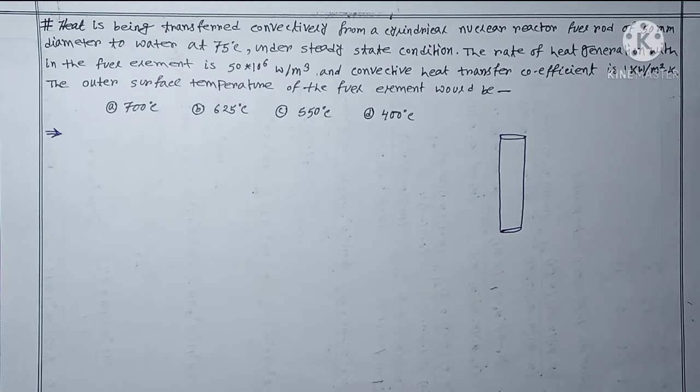In this video I will solve a few questions which will be very helpful for you for any kind of competitive exam as well as for your university exam. So let's go to the point of discussion.

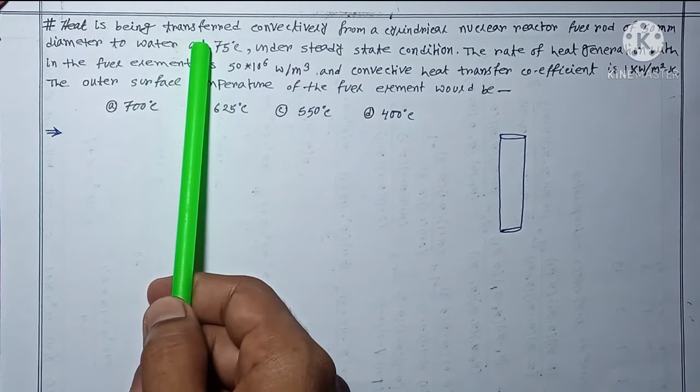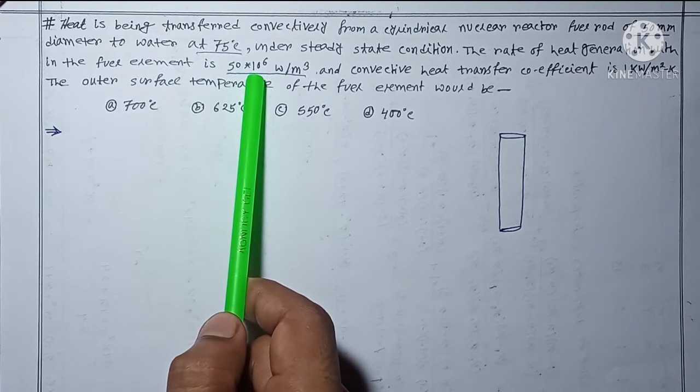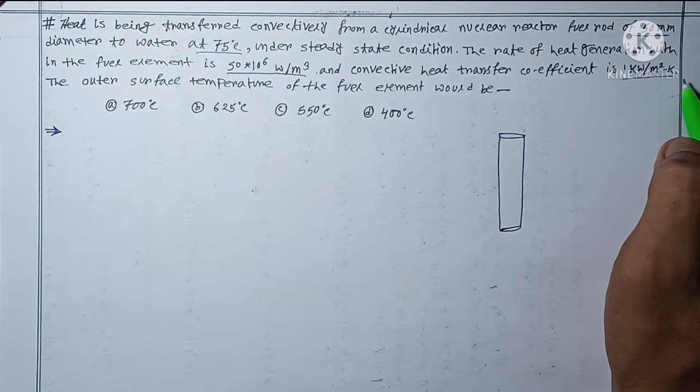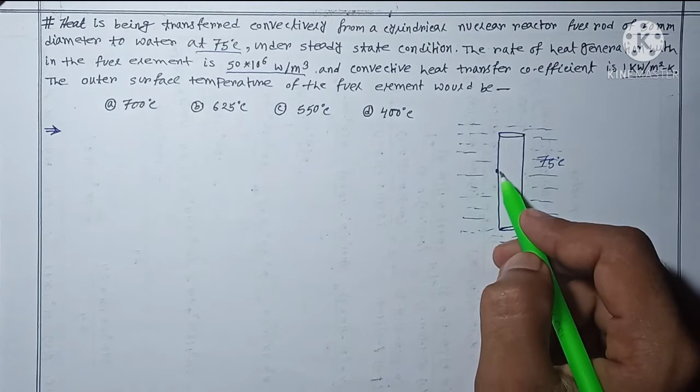First of all, carefully read the question. Heat is being transferred convectively from a cylindrical nuclear reactor fuel rod of 50 mm diameter to water at 75 degrees centigrade under steady state condition. The rate of heat generation within the fuel element is 50 into 10 power 6 watt per meter cube, and convective heat transfer coefficient is 1 kilowatt per meter square Kelvin. The outer surface temperature of the fuel element would be — so basically this is the fuel element, a nuclear rod, and around this nuclear rod there is water. The temperature of the water is 75 degree centigrade, and we have to find out the temperature of the nuclear rod, meaning the outer surface temperature of the nuclear rod, anywhere at the outer periphery. So let's try to solve the question.

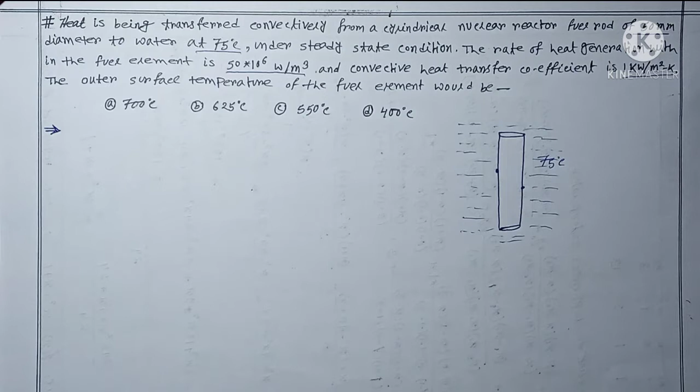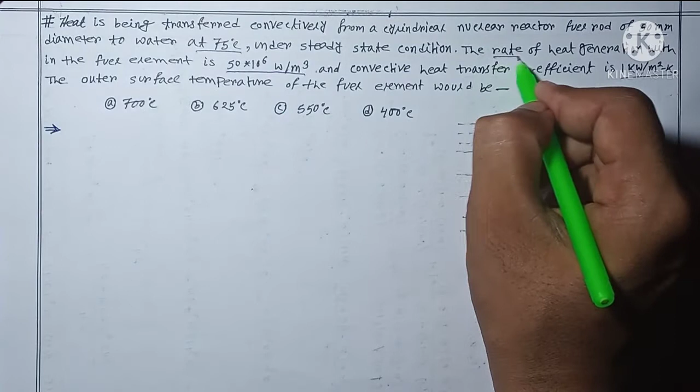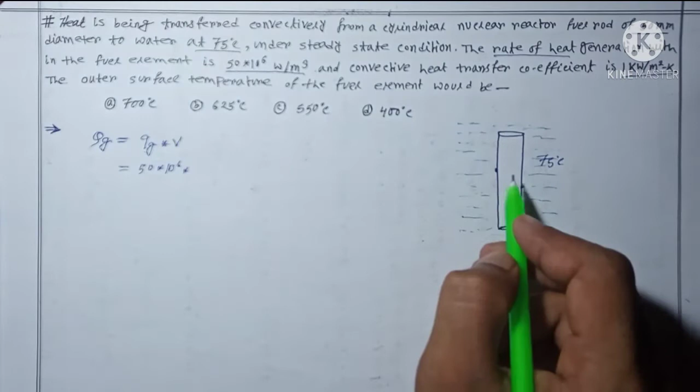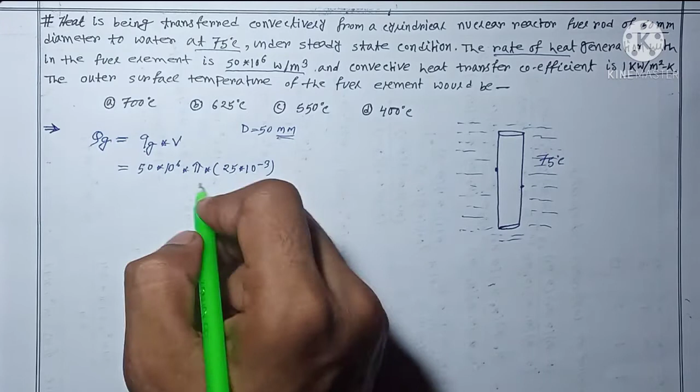First, here the heat generation is given in watt per meter cube — basically it is not heat generation, it is the rate of heat generation. So first of all we have to find out the total heat generation. Let we represent it as Q suffix G, total heat generation, capital QG. It is the small qg which represents the rate of heat generation into total volume. Now this small qg gives us 50 into 10 power 6 into volume. The rod is cylindrical in shape, so volume is pi r square into length. R value is 50 mm diameter, so radius is 25, and it is in millimeter so we have to convert it in meter, so 10 power minus 3. So pi r square into length — this is the total heat generation.

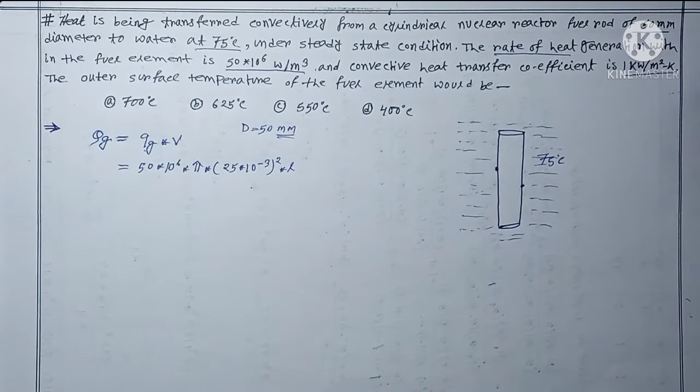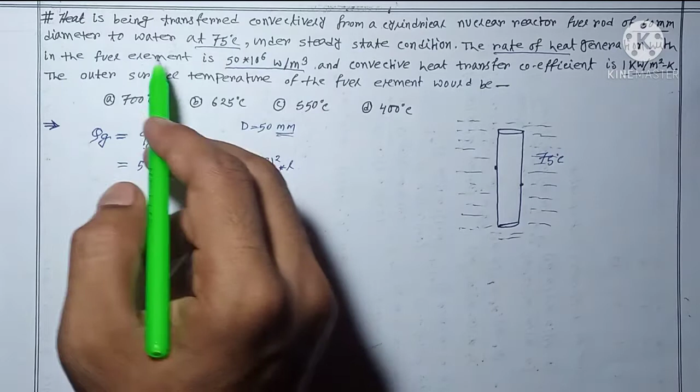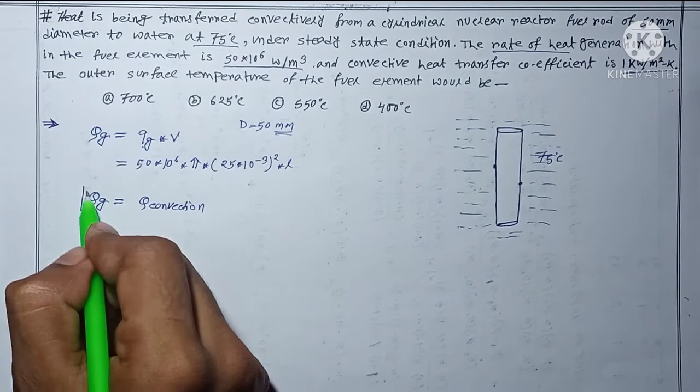Now carefully try to understand. Whatever heat generation takes place, we assume this total amount of heat generation is convected to the water — this is also given, heat is being transferred convectively. So whatever heat generation takes place, it is convected to the water. So we required to equate this total amount of heat generation equal to the total heat convection. This is the basically main point for such kind of question to solve. Whatever this amount of heat generated, it is basically transferred to the water, so we can equate total amount of heat generation equal to heat which is convected to the water.

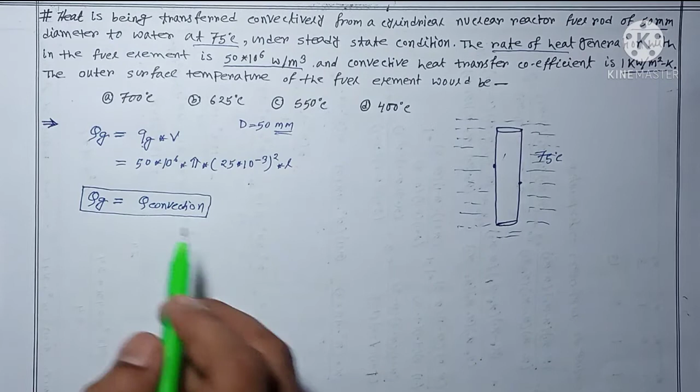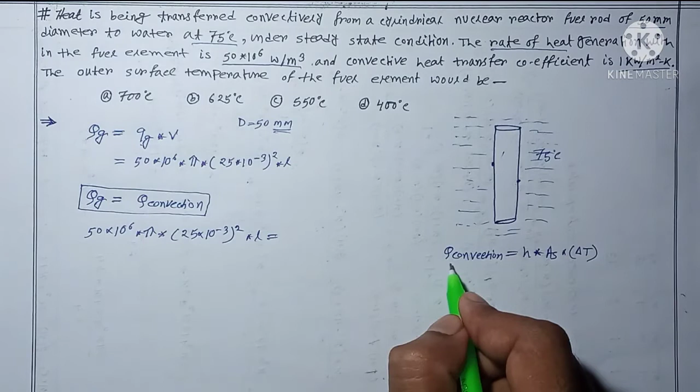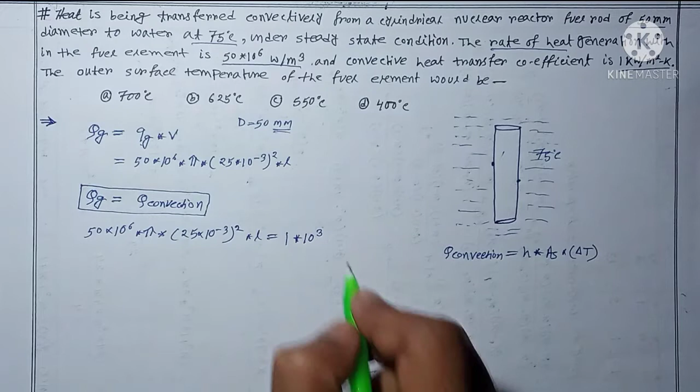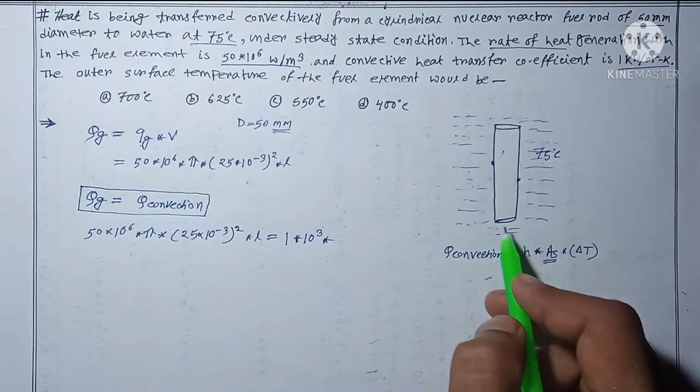So heat generation we are getting: 50 into 10 power 6 into pi into 25 into 10 power minus 3 square into L. Now this heat convection, Q convection, can be written as H into surface area into delta T, meaning temperature difference. Here this H is the convective heat transfer coefficient, given as 1 kilowatt per meter square Kelvin, but we have to convert it to watt, so multiply by 10 cube. Now this area is basically not the surface area or the cross sectional area — you have to remember this area is the area through which the heat is transferred. So based on the question, it may be cross sectional area or surface area. Here it is surface area, because throughout the whole surface heat is convected to the water, so we have to take surface area. Surface area for a cylinder is 2 into pi into r, r is 25 mm, converted to meter it is 0.025, so 2 pi r into L.

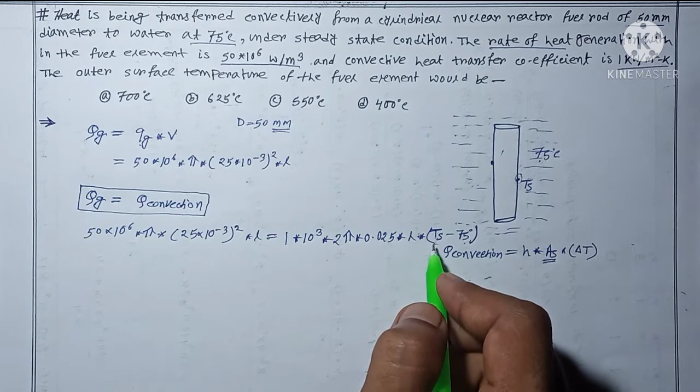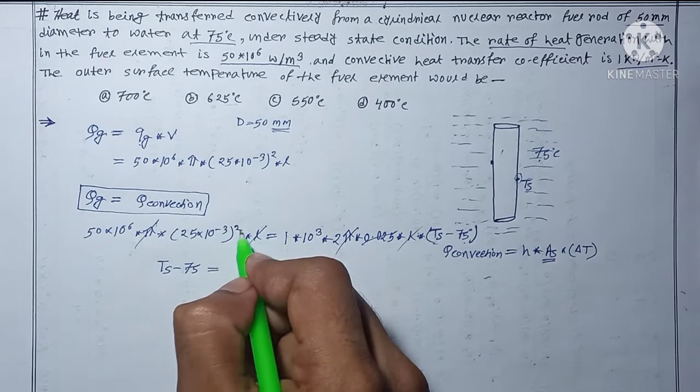Now here, temperature difference — obviously heat is generated in this nuclear rod, so surface temperature will be more than the water temperature. So let we assume Ts is the surface temperature here, minus 75 degree centigrade. Now before putting this 75 degree, please take a look at the option — if in the option they provide the answer in degree centigrade, then put it here in degree centigrade, because this is the difference in temperature, so whatever unit you put here, this will be your answer's unit. So here I put 75 degree centigrade, so whatever surface temperature I get, it will also be in degree centigrade. So here pi gets cancelled out, this L gets cancelled out. If I solve, then surface temperature minus 75 degree centigrade is equal to — and one thing, this 0.025 basically cancels this square term.

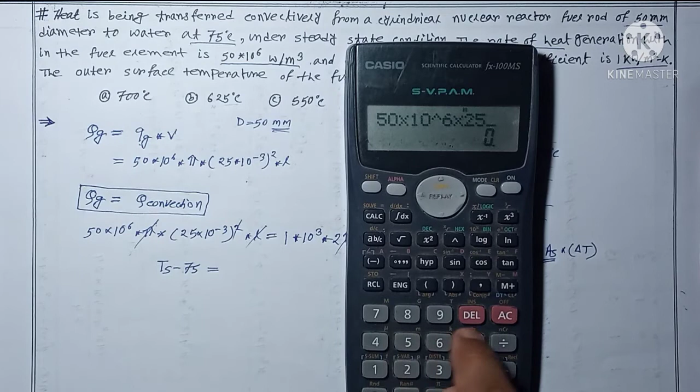So with help of calculator, let it solve: 50 into 10 power 6 into 25 into 10 power minus 3. I'm not taking the square, because this square is cancelled out by this 0.025, which is nothing but 25 into 10 power minus 3.

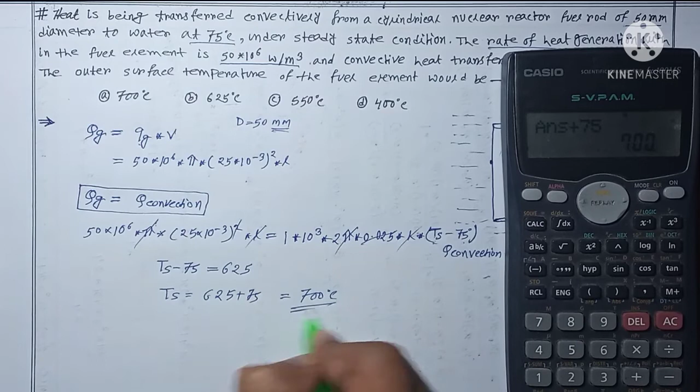So if I multiply it, I'm getting some value divided by this 10 cube. So I'm getting 1250 divided by 2, so 625. So surface temperature is 625 plus 75, I'm getting 700 degree centigrade. So basically option A is our answer.

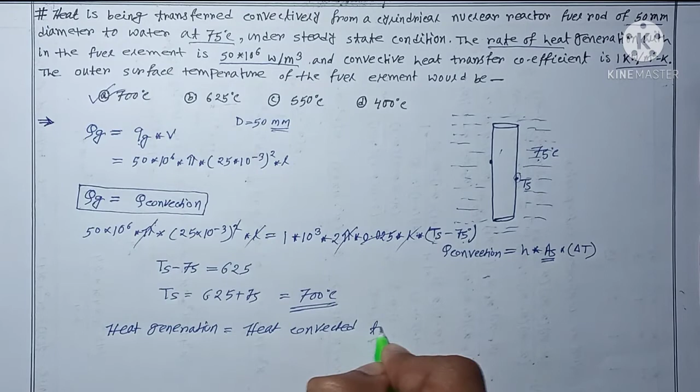So in this question, the point which you have to understand is that whatever heat generation occurs, this heat is basically convected to water. Heat generation is equal to heat convected to water. So it is clear now.

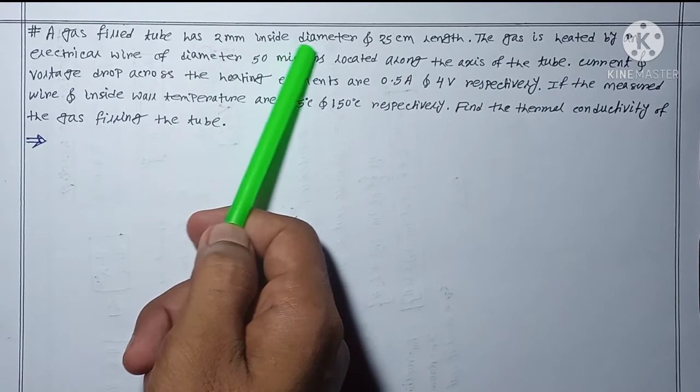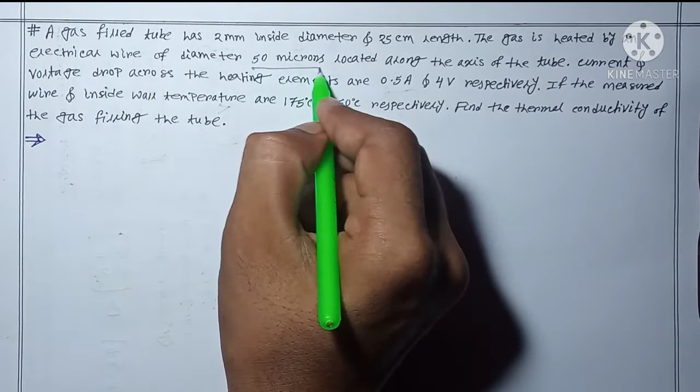Now solve the next question. Carefully read the question. A gas filled tube has 2 mm inside diameter and 25 cm length. The gas is heated by an electrical wire of diameter 50 microns located along the axis of the tube. Current and voltage drops across the heating element are 0.5 ampere and 4 volt respectively. If the measured wire and inside wall temperature are 175 degree centigrade and 150 degree centigrade respectively, find the thermal conductivity of the gas filling the tube.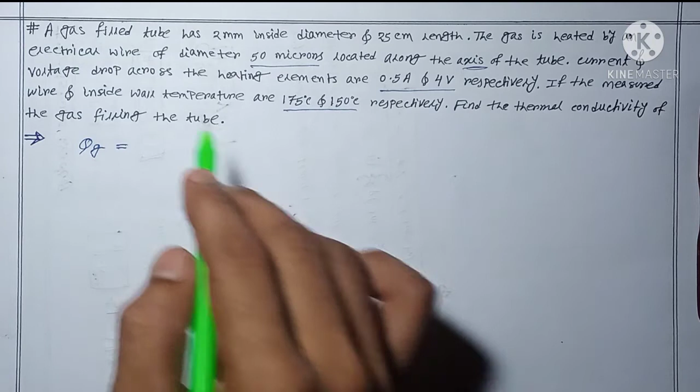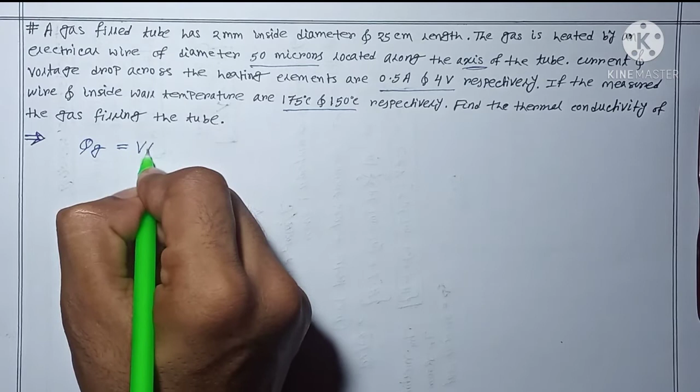First thing, here you have to find out the total amount of heat generation. This is your first task. So heat generation, once again if I represent it as Qg, here whatever the heat generation is, this one is due to the voltage drop and current drop across the heating element, meaning the electrical energy converted into heat energy. Now we know heat energy from electrical energy: heat energy is equal to V into I. So here V is 4 volt, current is 0.5 ampere, so it provides us 2 watt. So this 2 watt is the total amount of heat generation.

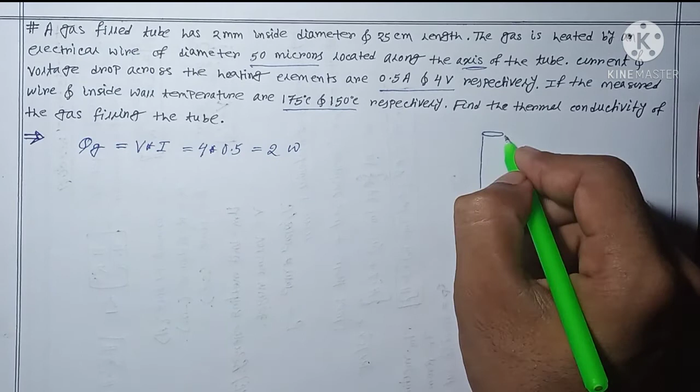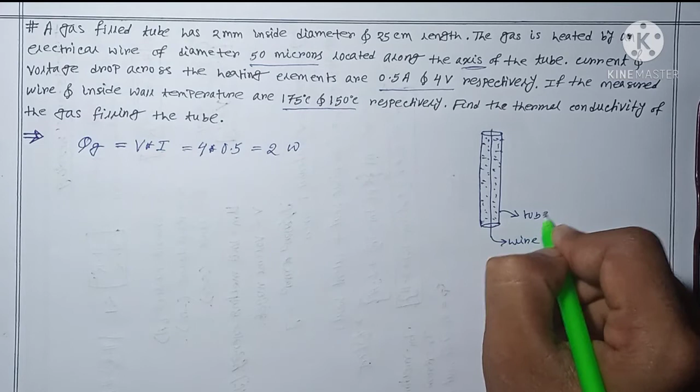Now carefully listen. Here they basically say that if we are assuming this one is the tube, and a heating element which is nothing but the wire with 50 microns diameter is basically placed along the axis of the tube, and the tube is filled with some kind of gas, we have to find out the thermal conductivity of this gas only. This one is the wire, this one is the tube, and this is the gas which fills the tube.

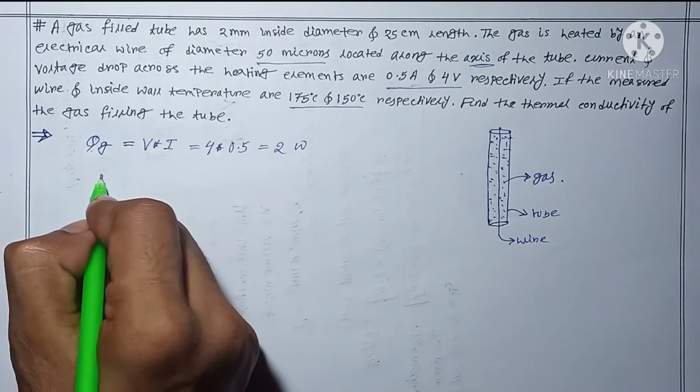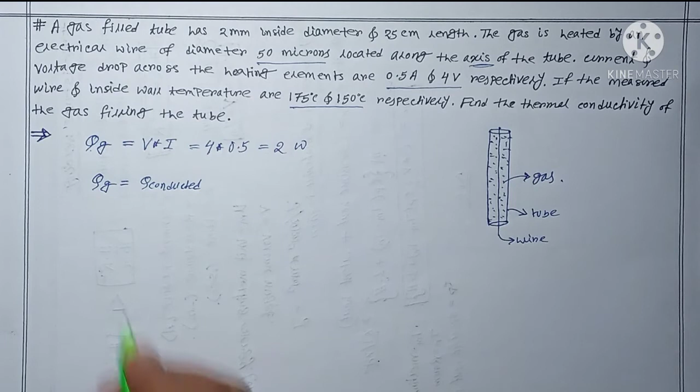Now we get the heat generation. Now you tell me, the heat generation is basically conducted to the gas. Is it clear or not? Total amount of heat generation due to the voltage and current drop is basically conducted to the gas. Meaning, if we equate this total heat generation equal to heat conducted, then it is absolutely right. Now heat generation we get as 2 watt, so 2, but heat conducted for a cylinder is 2 pi k of this gas.

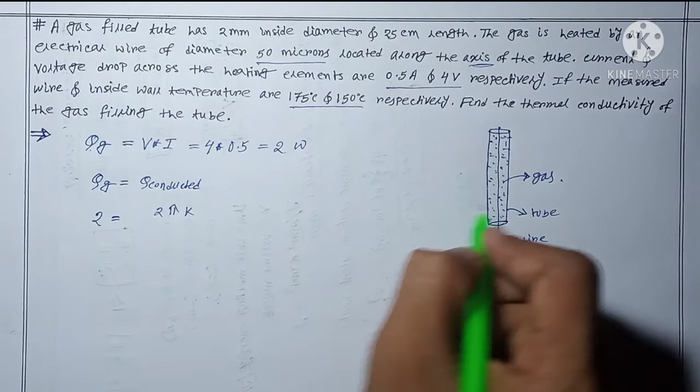So I'm here writing k gas, 2 pi k into length into temperature difference. So first of all, temperature difference means the temperature of the wire and the temperature of the inside wall, which is nothing but temperature of the wire minus temperature of the wall, divided by ln of R2 by R1. It is clear.

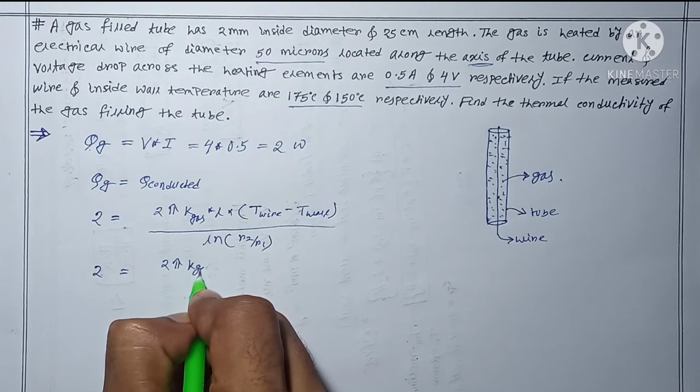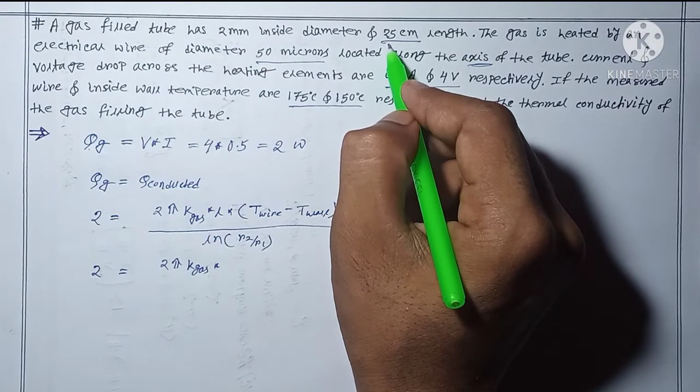So 2 we already found. 2 pi k of gas is unknown, which we have to find, but length is provided to us. Length value is how much they give? They provide us length as 25 centimeter. So 25 centimeter, if you put it in meter, it will be provided as 0.25, and then temperature difference is 175 minus 150, divided by ln of R2 by R1.

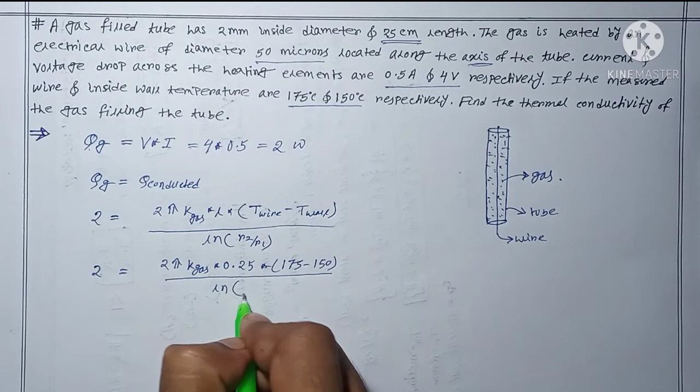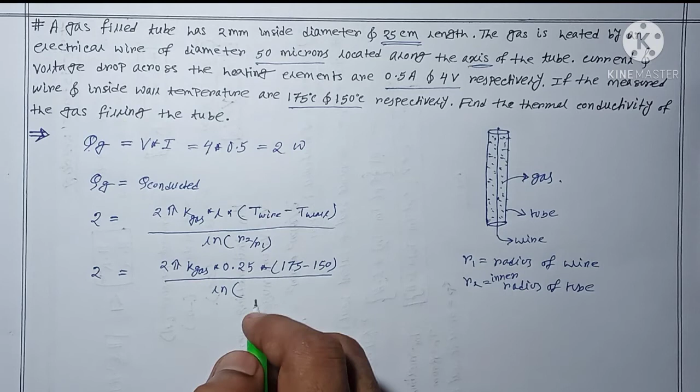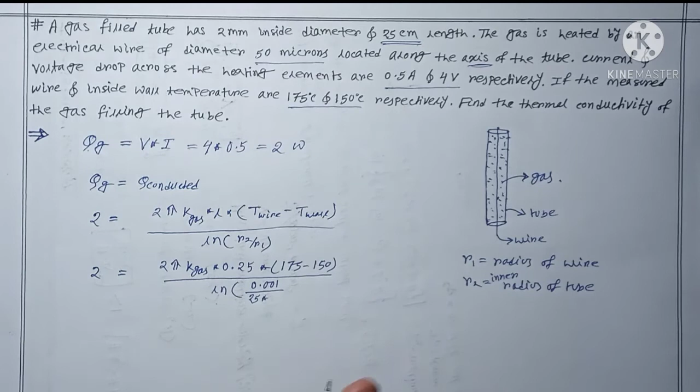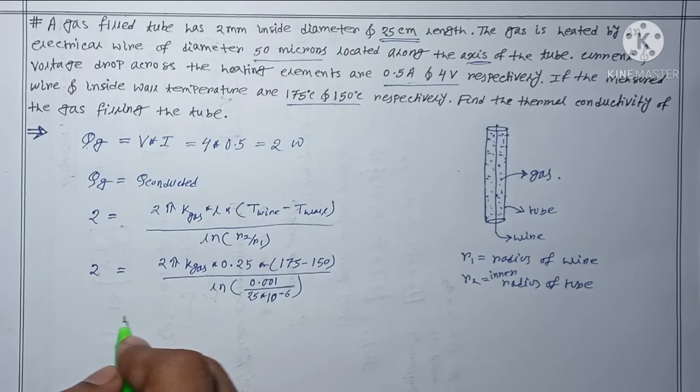Let me write it here. R1 is the radius of the wire, and R2 is the radius of the tube, or you can say the inner radius of the tube. So inner radius of tube is 1 mm, which you can write as 0.001 meter, and the wire radius: 50 microns is the diameter, so 25 microns is the radius, but we require it in meter, so 25 into 10 power minus 6.

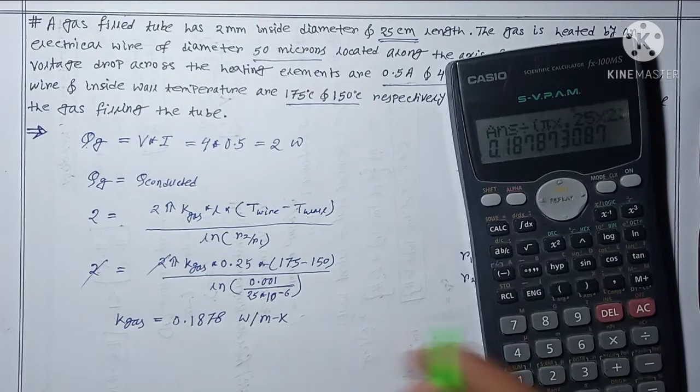So from here if you calculate, you can find out the k of gas. Let's calculate. First, this 2 and this 2 get cancelled out. First ln of 0.001 divided by 25 into 10 power minus 6, this one goes this side, divided by pi into 0.25 into 25. So we are getting 0.1878 watt per meter Kelvin. So basically this one is our answer.

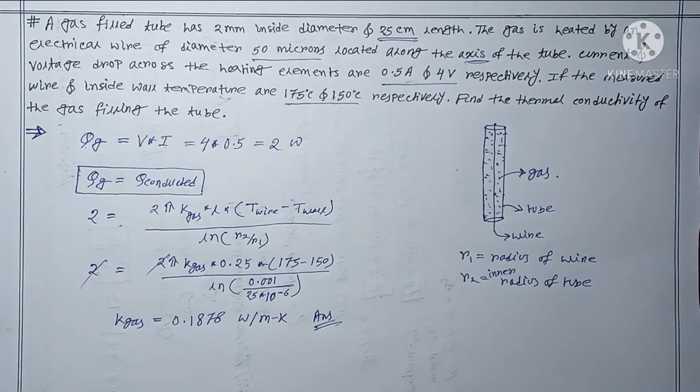So in this question, the main point you have to observe is that the heat generation takes place, and this amount of heat generation is basically conducted to the gas. This concept is not only important for this question; this such kind of concept is important throughout the heat transfer subject. The total amount of heat generation is equal to the heat which is convected or conducted to the surroundings. So I think the concept whatever I wanted to provide you, this one is clear to you, and in this question, this much only.